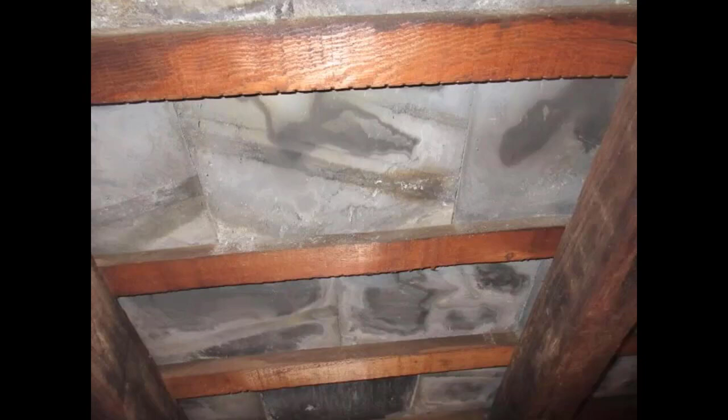A low pitch slate roof, you can walk on it. You stand on the middle of the slates, and they don't break. If the slates are breaking, the roof is failing, and you should see that before you get on it. But you're certainly not required by any standard to walk on the roof.

Here you can see this is a hard purple slate, probably came out of Vermont. Various sizes, very nice roof, really tremendously expensive roof. You just don't see anything like this installed in new construction. Well, I don't know. I don't inspect the $5 and $10 million houses, but I still don't think they're putting

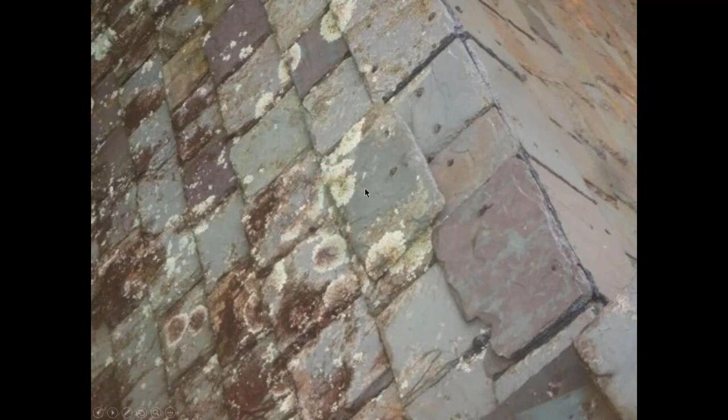these roofs on. Minor repairs, but these slates, even though they're probably close to 100 years old, there's nothing wrong with the slates. That's just moss. And one thing you would never tell somebody to do is power wash, well, any roof, but certainly not a slate roof. When you're in an attic with a slate roof, you will see daylight.

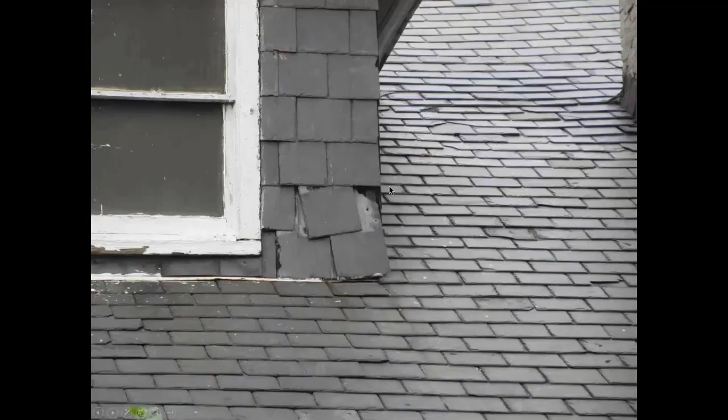The slates don't sit flat. So you're looking for big pieces of daylight or missing slates. Here you can see a slate's problem has been repaired. You can see tar repairs there. And again, these roofs will be nursed along with repairs for potentially decades.

Anytime I see a wooden roof, I just tell my clients, I'm very sorry for you. Wood shingles, wood shakes used to have tremendous durability. A wood shingle roof on a house was generally triple coverage, could last 50, 70 years, but the shingles and shakes these days have no decay and disease resistance.

When they were cutting down 100-year-old cedar trees and splitting the shingles out of the 100-year-old wood, those shingles would last quite a long time. Now the trees are grown 20, 30, 40 years. They're cut down, made into shingles, shakes, and 10 to 15 years is pretty much typical life expectancy for a new wood roof. And they're expensive.

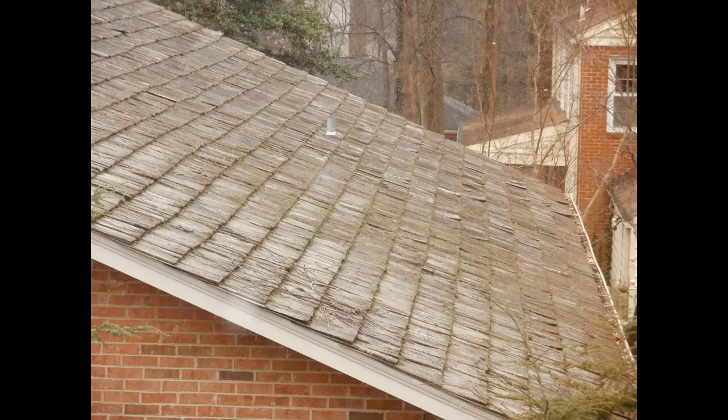This again is a shake roof. The shakes are lifting, and if you could get on that roof, you would see the interlayment in the shakes. I mean, that roof is pretty well gone. It may not be leaking. A lot of times on an old barn, you can look and see daylight, but when the rain hits the wooden shingles, they'll swell and seal.

Also, wooden roofs can be installed with no underlayment. A new wood roof, a lot of times they put them on solid sheathing with an underlayment beneath them. There's a lot of people that feel that when you install a shingle or shake roof on spaced sheathing with no underlayment, the air can circulate underneath the shake and they can dry out.

They last longer. When you put it on solid sheathing with felt paper under it, the underside has no air circulation. The water is trapped. And, again, a lot of people feel that compromises the longevity of the material.

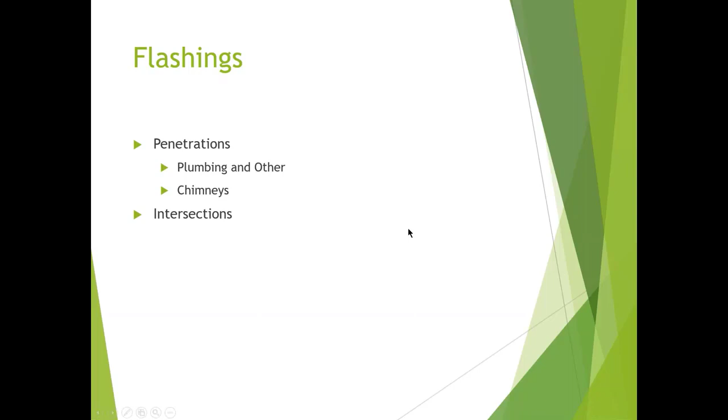With the roofing, the flashings are critical. With any system, it's the details. In roof installations, it's the flashings. Flashings at the penetrations, your plumbing and other vent pipe penetrations, furnaces, metal chimneys, metal and masonry. The intersections, the intersection between the roof and a wall.

You're also looking at the valleys. A lot of times the roof will leak at a valley. Also looking where a roof changes in pitch between a steeper roof and a low pitch roof. The code calls for flashing in these areas. You don't know if it's flashed, but you're looking underneath those areas for signs of leaks.

You're also looking again for problematic designs and installations. Sometimes the architect or whoever is designing an addition or designing a roof initially will just design for the appearance, and they'll say the roofer will be able to make this not leak. And in some situations, no matter what the roofer does, it's going to leak under the right situations or the wrong conditions.

The two-piece flashing system, the step flashing and the counter flashings, allow the wood structure to move in relation to the masonry. Wood expands and contracts with temperature and humidity. Masonry basically doesn't move. So the masonry doesn't move, the wood moves. If it's a one-piece flashing in this area, that flashing is subject to the movement of the wood roof and will ultimately start to fatigue and fail.

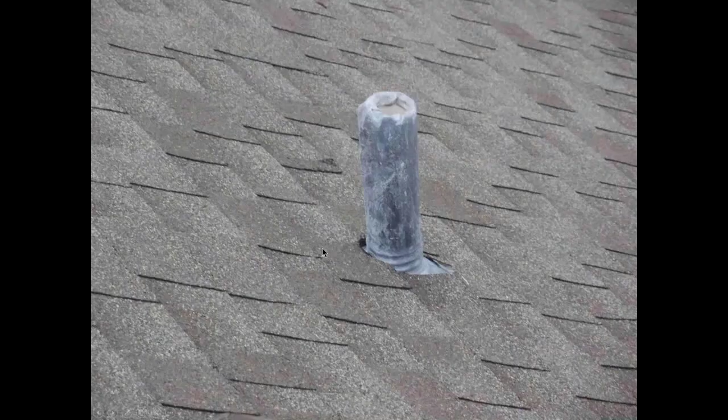Plumbing and other penetrations through the roof. This is something you don't see very much, but this is a lead boot installed. It actually goes over the entire pipe and is folded down inside the pipe. Lead flashing like this will outlast these shingles. It will last longer than 2 or potentially 3 roofs, as long as nobody puts a nail through it.

There are easy ways to fix this. I've seen where they just get a rubber boot and put it down over top of it. Sometimes they'll take a whole flashing, put it down over top of it, and there's basically a hard plastic, I think it's not roof helmet, I'm thinking gutter helmet. It basically looks like a helmet, but fits down over the vent pipe, covers this whole shooting match, and is good basically forever. But these are leaks, so you don't want to miss them.

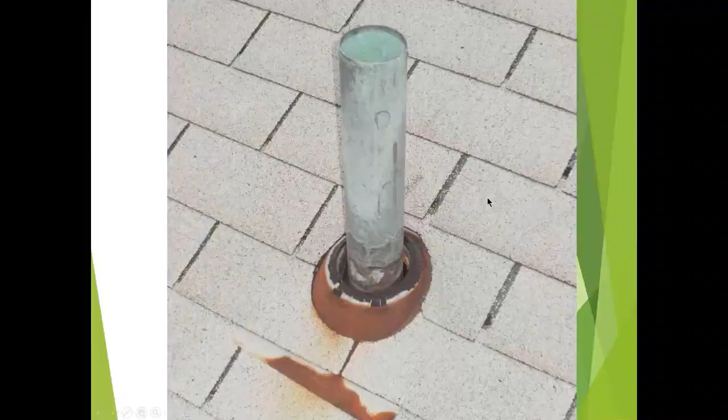Here the boot's just gone. Copper vent pipe. The shingles are fine, but it looks like when they replaced the roof, they just reused the old flashing.

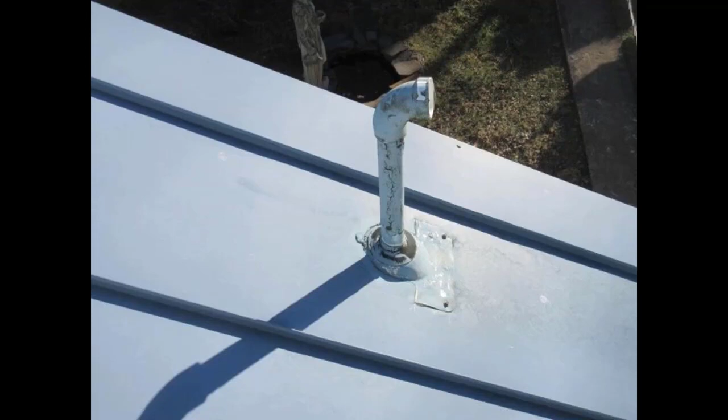This is ideally how the flashing should be installed in a metal roof. There's a slot. Here you can see it's not just a slot, but a U shape, and then tees out at the bottom. The plumbing vent flashing is slid up underneath that, and then the pipe is installed. You've got to put that flashing in the roof before you put the pipe up through it. You can't retrofit that. This is the retrofit. This is the ideal situation.

I've only seen that flashing installation a couple times. It's the same roofing company that did the gutter straps attached to the standing seams. Again, extraordinarily nice metal roof installation.

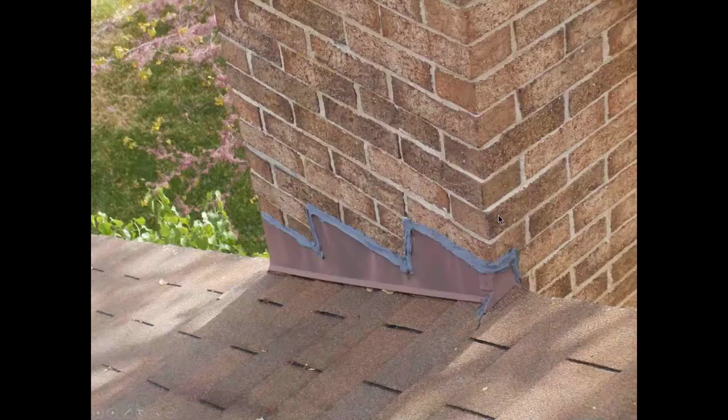Your chimneys. Through the roof, adjacent to the roof. We saw where the flashing was installed in the reglets, the open mortar joints, and then bent in and installed. That is the exception today. The rule is you'll have the step flashings installed.

This is your counter flashing, but it's just nailed to the masonry, and then the top of that is just sealed with caulk or roof cement. So every 2 to 3 years, somebody just needs to get up there, take a look at that. If it's cracked, reseal it, or if they're up there, just reseal it anyway. The metal expands and contracts and is constantly working to try and pull away from the brick, and sooner or later it will.

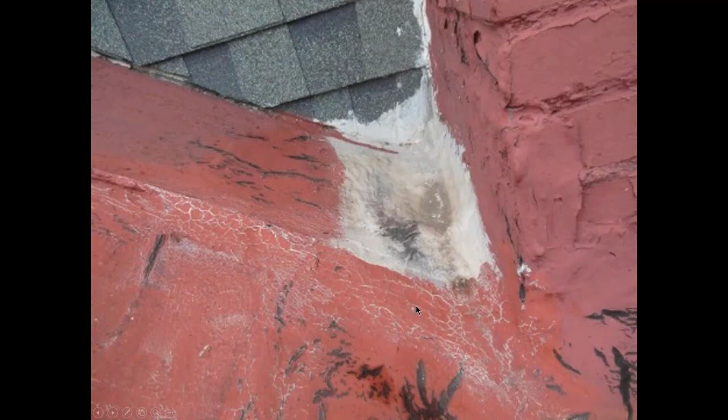To install a cricket, basically this entire thing gets taken apart, and with an old metal roof like this, a repair like that is difficult, and so people will just continue to tar it until they replace the metal roof. Again, you can see water's just ponding there. There are holes in there. You can see the sealant pulling away and cracking, and so it just leaks and leaks.

So all these are leaks. If it's not leaking this rain, it's still a leak. Nobody needs to evaluate it. It's a leak. It needs to be taken apart and rebuilt properly.

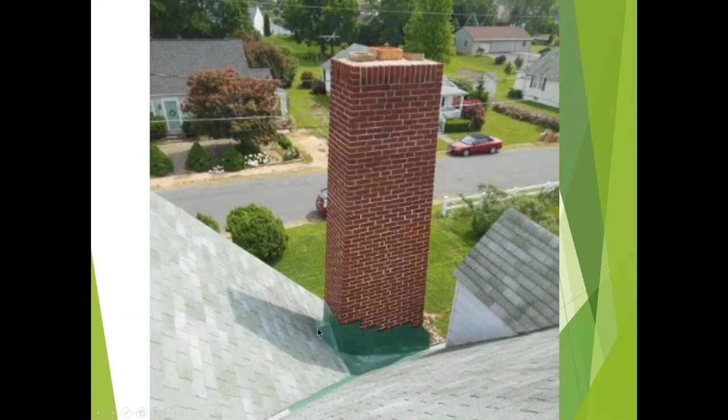How do you create a roofer's nightmare? You collect a ton of water in a valley, you build a giant chimney, and you put it at the bottom of the valley. The initial installation was a really nice piece of metal work in there, flat seam metal, solder joints, little cricket on this side. Could have done a cricket there, but they just did a large valley.

But again, over time, there's metal movement and fatigue where the metal just fails. And then people just get in there and start to caulk and tar and do all kinds of things. That's a leak. If not immediately, then soon that will just leak again. It's been repaired, and the repairs are just not permanent.

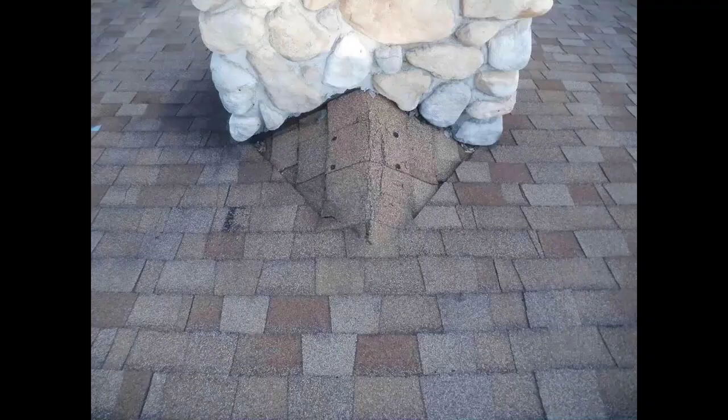Here, you've got a little tiny cricket built behind a concrete block chimney. Somebody just put the manufactured stone over top of it. Virtually impossible to repair this situation when things start to leak. You have to take the stone off to get to the flashings.

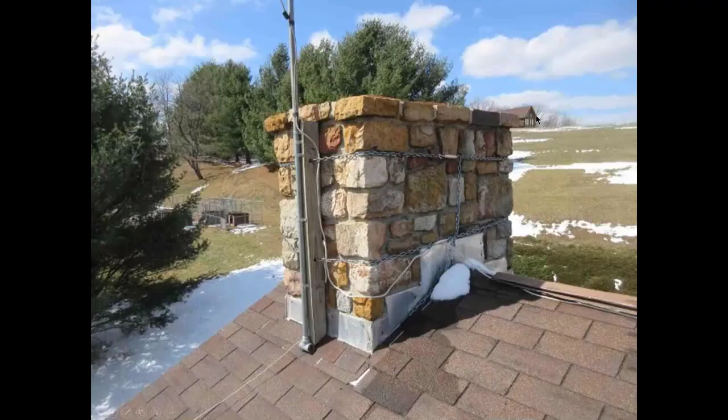Nice flashing. Somebody's actually chaining their antenna. They were sure that antenna was not going to blow off unless the 2x4 cracked. Even did a very nice job of putting a T on the iron pipe, the galvanized pipe holding the antenna mast, so it wouldn't poke a hole in the roof. And turnbuckles on the chains.

Of course, the cap on the chimney is probably cracked and leaking and letting water down in through the chimney. Here's your counter flashing set into reglets, so very nice, and somebody just had to have their antenna. Here you can see the top of the chimney is deteriorating.

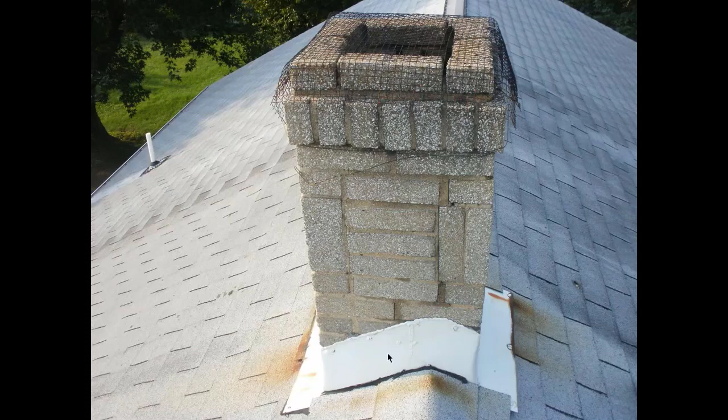Flashing is just sealed to the brick, and when you've got the joints in the brick, the mortar joints, your sealant is hard pressed to seal those tightly. So the only thing that can be done at this point is just keep resealing it, and ultimately it's kind of a small chimney to put step flashing and counter flashing in, but that's what should be done.

But even if it's perfect, go in the attic. You want to look at this, remember where this is when you go in the attic, and check the area above the fireplace. Most times you can see that chimney in the attic. You're looking for stained sheathing, rot, repairs, new sheathing. But these are leaks.

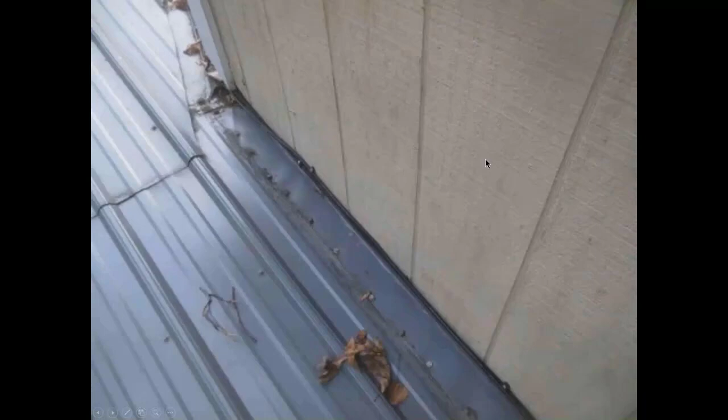Roof wall intersections, your flashings. No matter what you do with Texture 111 plywood, you're going to get leaks. The counter flashing should be under the Texture 111 plywood before that plywood is installed. Here you basically just have leaks. You fill the vulnerable area with holes by putting lots of fasteners in it, and then you just attempt to seal it. These are leaks.

Texture 111, the plywood sidings, any flashing should be under the plywood. Anytime there's a flashing installed on the plywood, it's just a leak.

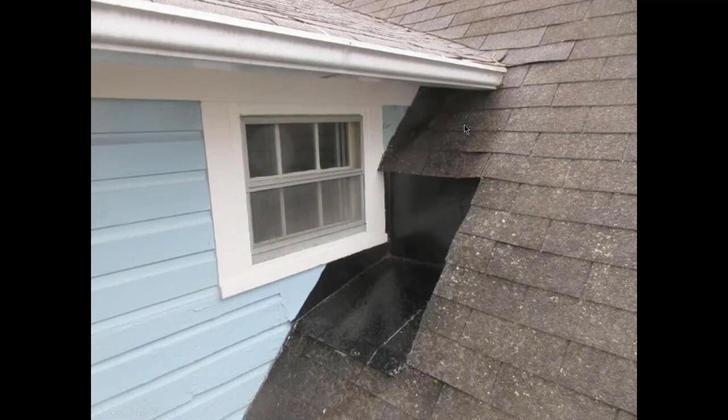Here, for whatever reason, the window was in the roof framing, whether it was an addition out the back or that's just what they built. Metal roof system installed in the cutout, nicely flashed, and the windowsill is not sitting down on the roof. So odds are pretty reasonable that it has worked successfully from the day it was installed.

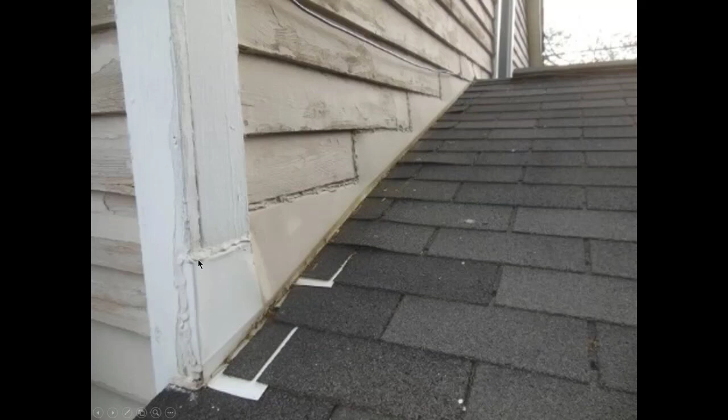Then they run down into the corner board and it didn't work so well there. So they did bend the top, put a caulk joint, and it has been leaking because they were caulking the corners of the boards. They were caulking all this. The water just came down and actually may have been getting in the intersection here at the back of the corner trim and just sneaking its way in.

So, they're thinking the water's coming in up top there. It most likely is just coming in right where the roof runs into the back of that corner trim. The flashing should have gone behind that corner trim and then the wood trim be installed. But the roofer's not a carpenter. He's not going to take the trim off, install his flashing, put the trim back. He's going to do whatever he can to avoid pulling that wood off and actually flashing it properly.

Again, this is just amateur work, step flashings, no counter flashings, a German siding with a profile to it, and just load it up with caulk or tar, and it's leaking almost immediately, and no amount of repairs will actually fix that. Ideally, the siding would be cut back, step flashing, and then a trim board installed with a flashing under the cut over the trim board.

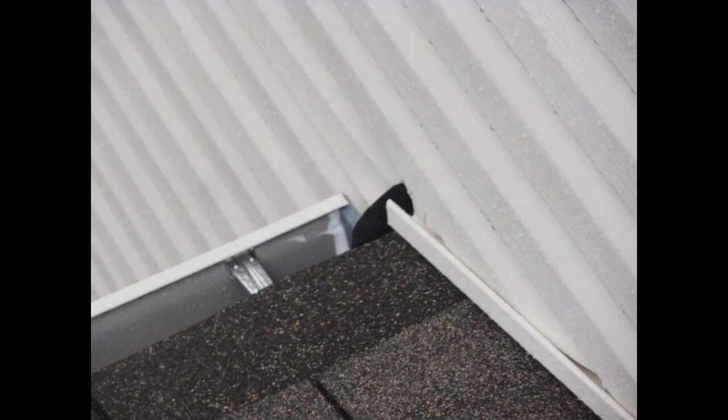Kick-out flashings, they are now in the code. They have been in the code for 10, 15, 20 years, and they are now starting to really actually look to see that they are there. In new construction, this is a little teeny kick-out flashing. If you don't know what a kick-out flashing is, basically, water running down the roof should be directed away from the sidewall and kicked out into the adjacent gutter. That's what a kick-out flashing does.

They should be a minimum of, I believe, 5 inches tall and 3 or 4 inches wide. So you should see basically a big piece of metal, and you can see these from the ground. If they're not there, you should definitely be recommending that they be installed, or at a minimum, where the J channel ends, just caulk that intersection to have the water head out and not behind the siding.

Here Dave? Again, there's a kick out. Yes, sir. Also, the gutter ends, both in the previous picture and this picture, that gutter end just below your cursor is supposed to be a minimum of 1 inch away from the siding. There's actually supposed to be an air gap between the end of the gutter and whatever sheathing you've got. Well, the siding, and I think that applies specifically to HardiePlank. I don't know that that's a requirement for vinyl siding, but it certainly is not a bad idea.

With HardiePlank, that's a manufacturer's spec. I don't know that that exists with vinyl siding, and certainly, you know, it should be there with wood siding, but again, I don't know that there's any recommendation specifically for that. But with HardiePlank, absolutely, that's in the manufacturer's installation instructions. Thank you, Bob.

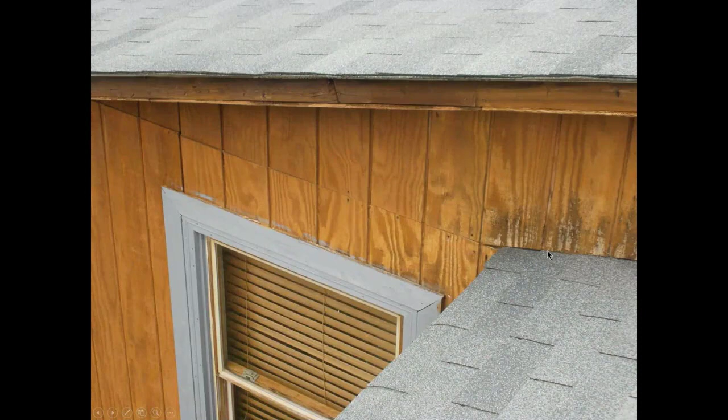Here, no flashing, wood roof down. Hopefully there is a flashing underneath the siding. There should be a space between the wood roof and actually wood or hardy plank. The installation instructions are actually pretty similar. The concern with hardy plank and with wood is you're trying to limit the absorption of water into the siding. So ideally the wood or hardy plank should be an inch or two above the roof. You should see the flashing, and there should be kick-out flashings.

Here you can just see literally the water runs down the roof and drains in the joint. I mean, this is basically a terrible installation of plywood siding. There's no flashing over the window. There should be a Z flashing at the horizontal joint. And you can also see the water is being wicked up into the siding there and ultimately deteriorating the plywood siding.

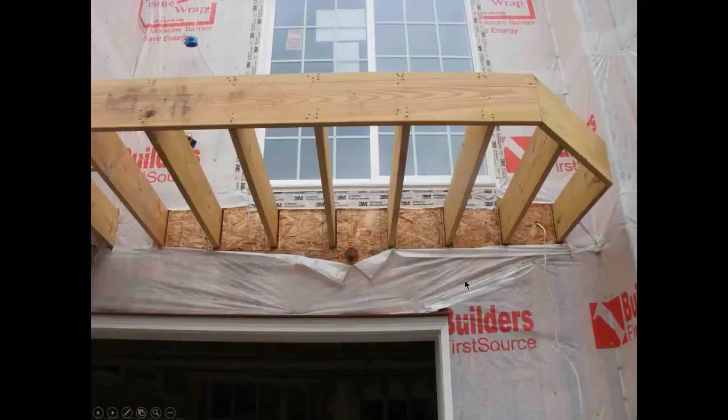These balconies where they poke the balcony out the side wall, there should be a horseshoe flashing installed over every joist that extends a few inches out that you should be able to see. These are never flashed properly. I can pretty much guarantee you they're never flashed properly. Doesn't make any difference. You just have water getting down. They're following these joists back in. These things are just going to be replaced wholesale in 5, 10, 15 years. With any amount of luck, not too many of them collapse before they start replacing them.

And these joists go back. If they stick out 3 feet, they should go back in at least 3 times. So if they're sticking out 3 feet, they should run 9 feet back in. When these start to rot and fail, water gets inside the framing around the joists. If the joists themselves aren't rotting, the framing supporting them is rotting. There are going to be major failures and replacements. Big bucks involved in this.

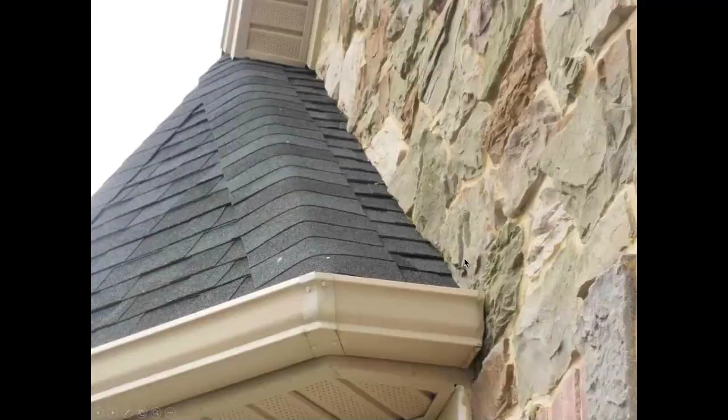Here, with the manufactured stone, the stone is supposed to be at least 2 inches up. You're supposed to have a flashing in there. When it's time to replace this roof at some point in the future, they're going to have to, who the heck knows, leave the existing step flashing. There should be a kick out here. The manufactured stone is the same as stucco, is the same as Hardie plank. The gutter should be an inch away. There should be a kick out flashing.

What do you tell your client buying a situation like this? It's not right. It potentially can be very problematic. You can have significant damage to your structure behind the stone. You can't see it. You can't see it in the house a lot of times. It's on the outside portions of the framing. Caulking might be some sort of a temporary help, but it has the potential for being a real mess. And you want to emphasize that in your report, not just saying it to your client, but it should be noted in your report as a problem item, even though no visible defects are showing.

Hey, Dave. Yes, sir. That last slide, they should have a 2-inch clearance over those shingles. Yeah, you should have 2-inch space between the shingles and the manufactured stone. That's correct. And definitely a kick out. You should see your flashing in there. Yeah. You should see your step flashing. You should see your kick out. And I mean, if you don't see it, again, your client's potentially buying the house.

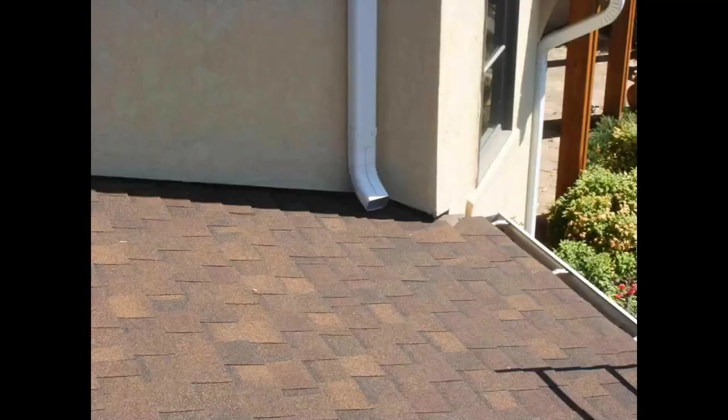Okay. And actually, when you're looking at details like this, you know it's a 5 or 10-year-old installation. Because really, when they're putting it up now, pretty much most of the builders do have a clue about this stuff now. They've all been tagged on it. Thank you. Here, your stucco is maybe a 1/2 inch up, so that's certainly better. This was probably at this point maybe a 15-year-old house.

And looking at this roof from the ground, that could be a situation that you could easily miss. So my recommendation is at a minimum, take your ladder. If you don't walk the roof, put your ladder up on the gutter and look at everything. Lift the shingles at the eaves. That'll let you see details like this to call out issues.

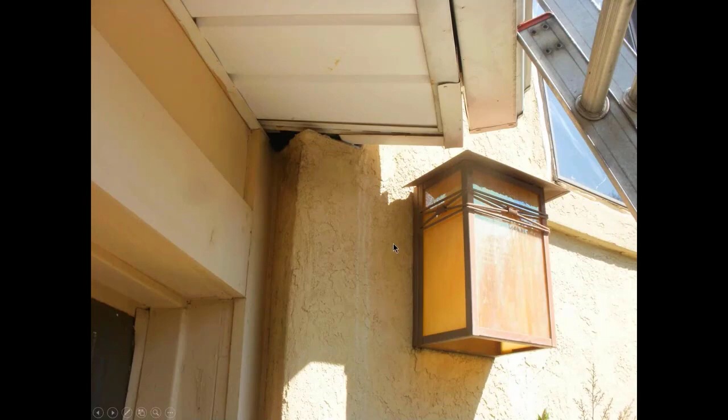Hey, Dave. Yes, sir. Sorry to keep interrupting. One thing on the last slide. I asked for it. Can you talk about the requirements for dimensional shingles on low slope roof real quick? There was a question about it before. On low slope roofs, do the same rules apply for architectural shingles? I think they're talking about the pitch. To the best of my knowledge, yes. But I do not have a specific answer for that.

It's an excellent question. I have not researched it, I do not know, but to the best of my knowledge, if you put that ice guard underneath, it's basically the same sort of installation. You're sealing around the nails. I don't see why it wouldn't work, but I do not have an absolute yes, you can, or no, you can't. If anybody does know, again, toss it in the chat box or chime in.

Hey, Dave. Yes. I thought it required 2 layers of self-healing ice and snow guard. That's what I saw the last time I looked it up. 2 layers of 15-pound felt over the ice and snow guard? No, 2 layers of self-healing ice and snow guard. Or the ice and snow guard? No, no. Once your pitch gets too low for just a regular installation, the last time I looked, it said 2 layers of self-healing ice and snow guard.

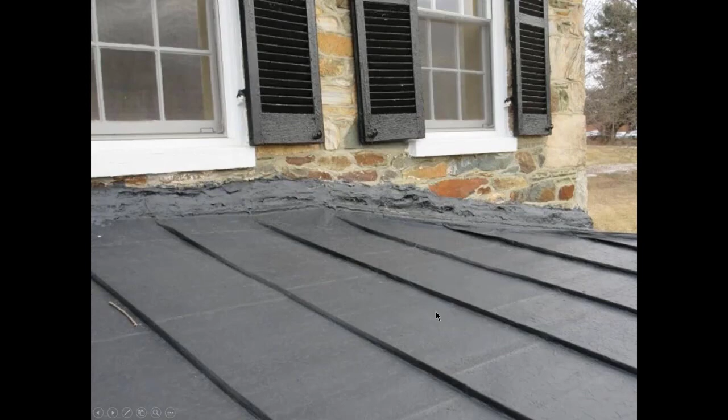Here, a metal roof to a stone wall, and somebody just simply gave up and brought out the 5-gallon bucket of tar. Beautiful stone wall, nice metal roof. And there's a possibility the porch settled and that roof pulled away, and they didn't know what to do but tar.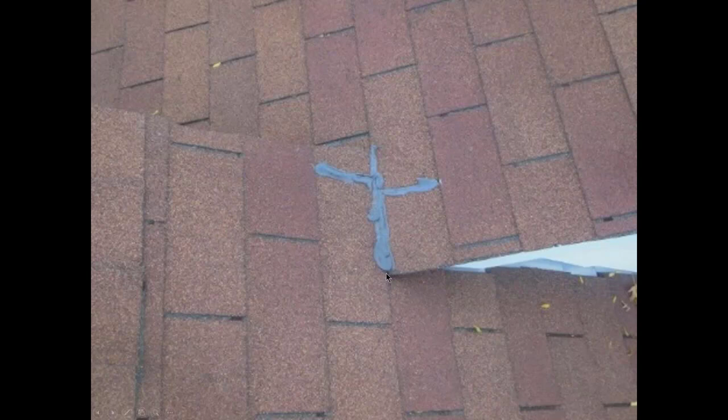Valleys. It's your condos where you have the horizontal valley. It's about a shingle wide, about 12 inches wide. There should ideally be a piece of metal in there. Many times there's not. They just seal it and hope for the best.

This is what you like to see. A piece of metal running underneath the whole thing with no nails in the metal that you can see. That should divert the water, and it's extended out past the shingles on both sides. That is not leaking. This is probably leaking. This most certainly is leaking.

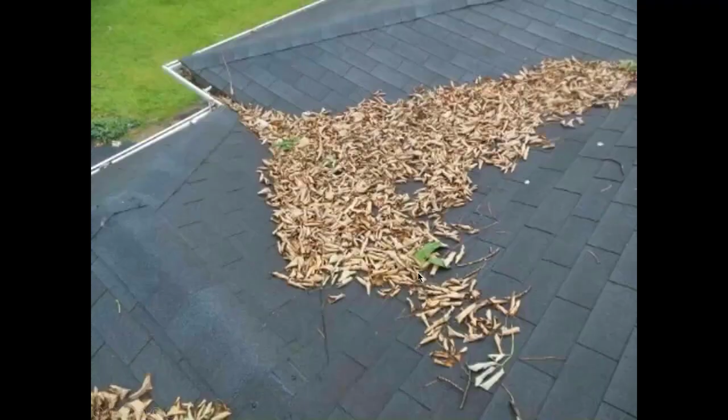Bad. Better than bad. Good. And best does not create the situation in the first place, but that's beyond your control. Here, you're collecting a bunch of water, aiming it at a valley. You don't see any indication of a low slope roofing material, and who the heck knows what's going on under all those leaves. But again, pretty much assured there's leaks in there somewhere.

Here, same situation, not covered with leaves, but you're collecting a bunch of water, aiming it, and then you've got a roof intersection here, a flashing intersection. That water's going to get down in there. No kick out flashing, no sealing at the top of the counter flashing or step flashing that is there. Leaks.

Aluminum expands and contracts. The aluminum valley flashing is supposed to be folded over with clips holding it so it can expand and contract. When the aluminum valley flashing is just nailed under the shingles, it's pinned, it still expands and contracts and will buckle. Aluminum, a very soft metal with very limited amount of flexing.

You actually cut aluminum flashing with a knife and then you fold it several times and it breaks at the slice. You do the same thing in a valley, you have leaks. And no easy fix for that. It's just take it apart and redo it. You tar it until you're tired of tarring it.

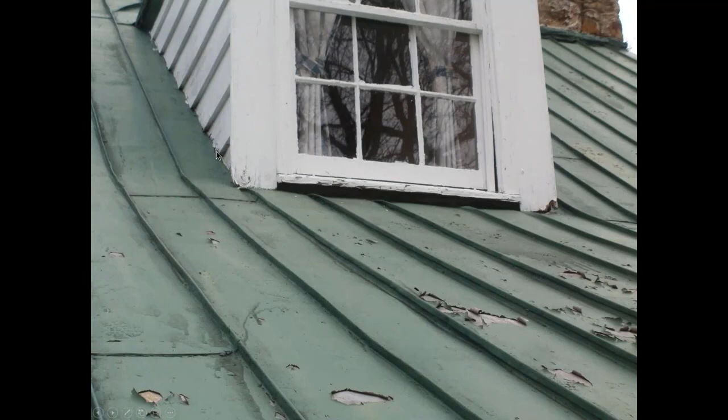But in northern climates, you get up into Pennsylvania, New York, New England, Canada, these things just leak like sieves. So there they understand how to do the underlayment to prevent these. But there should be a flashing wherever a roof changes pitch. Here, your metal roof is basically self-flashed, but when you run the change in pitch under the dormer, ideally you would have flashing running 6 or 8 inches up under all that wooden trim and that siding.

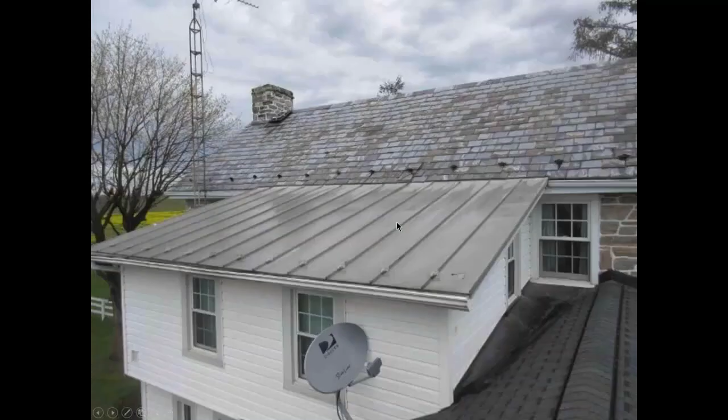You don't know, but you're inside. If you can get in the attic, look at these areas in the dormers when you're in the attic adjacent to it. If you can see those, look for stains. Here, you not only have a change in pitch, you have a change in material. This was the roof yesterday. The slates are deteriorated, so it's leaking.

When you see a situation like this, ideally, you want to see that the metal roof, the low pitch roof, actually runs up 18 inches or 2 feet onto the steep roof, and you should have the low pitch roof visible. You should not have the shingle or, in this particular case, slate roof running right down to the low pitch roof, because again, what you have with the ice dam issue is your shingle roof is filled with nails. So the metal roof that runs up and under, you've got holes there.

Snow melt runs down, hits the low pitch roof, you get your ice dam, and you basically get your ice dam sitting on the asphalt shingles or slate that's full of holes. So the ice dam material should run up, or you should see the low pitch material run up onto the steeper roof, and then ideally the shingles should be 1 foot or 18 inches up off of that change in pitch. This is basically a leak, and actually I have photos of, this is an active leak.

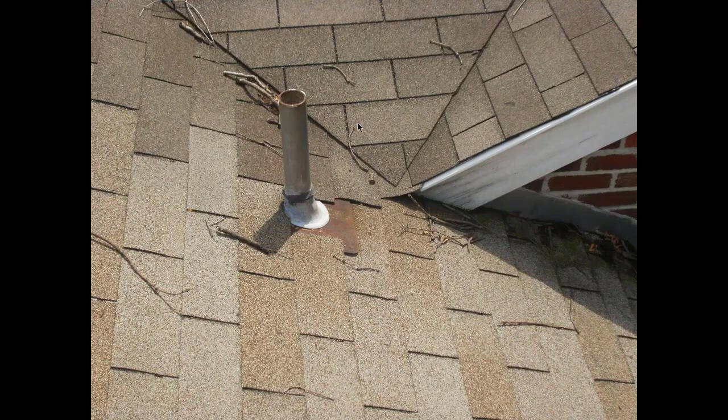Put a plumbing vent near the delicate situation. Again, a lot of times these are additions where other roofs are brought into play. 3 roofs draining into a valley. You've got a flashing that terminates there, and put a hole in the roof and load the thing up with ice and snow.

You do have step flashing and counter flashing. The step flashing has not been properly installed. The counter flashing was just slapped to the side of the brick and sealed multiple times. No cricket there. Collecting the water, draining it at the brick chimney, so the water's running down the side of the chimney in the attic. It's also probably running down onto the ceilings. It's just a mess. That's a problematic design. Funky installation.

This again was the house I saw yesterday, with an addition coming into an addition, a couple of windows, the window sills are sitting down. This is actually EPDM, I can never get it straight, the flat roofing material. They've actually kept the siding up a couple inches, but you got a windowsill. Again, it seems to be working fine. There were no stains on the window, no stains under each window, no stains on the ceiling.

Well, actually, I did have stains on the ceiling. Here, the stains on the ceiling were here. There were no visible stains anywhere here, but you load it up with ice and snow, water's going to find its way. All these are just sealant joints. Nothing else you can do. Pile up the snow and it's going to leak.

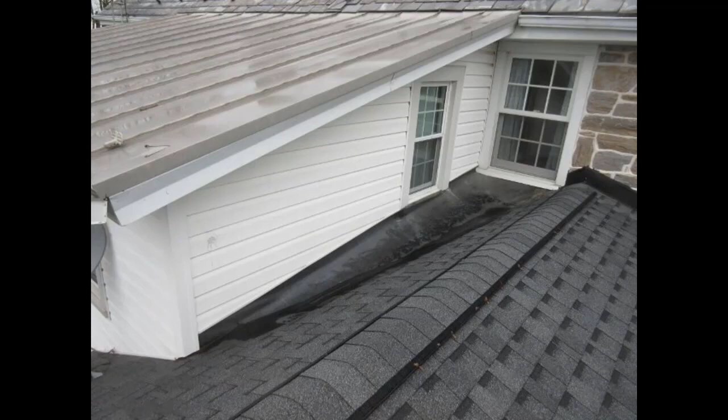Again, a situation that the roofer's going to fix. The roofer here did a very credible job, but under the wrong situation, it's 100%, it's got to leak at some point. What can you do with it? What can a roofer do with a situation like that?

You don't need to get on a roof to see these situations. This was a relatively low slope, 1-story addition, got up there, a lot of photos, but I knew that was leaking when I was in the bedroom looking out the window. Again, you take a photo like this. It's not the ideal photo, but if you're not climbing the roof, you're not getting out and looking at it.

You open the window, take a photo through the window. If you can raise the screen and get out, you can take more photos, but this is all you need. Again, you don't need to document perfectly. You just need to document this is a problematic situation. You don't have to get on the roof.

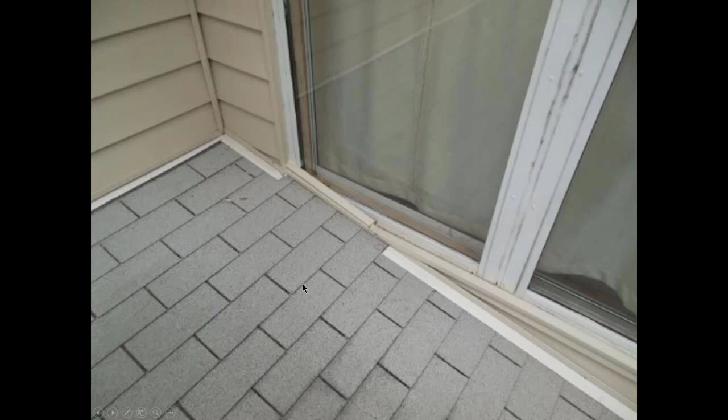Here, the windowsill actually runs below the level of the roof. You just can't possibly not leak. You know, how many negatives do you want to put in a sentence? But it is leaking. Maybe not every rain, but you get a good hard rain, it's leaking. Again, the windowsill is below the level of the roof. You can't keep water out of there. You can't seal that to make it not leak.

Down here, you can just see it's not a step flashing. It's a one-piece flashing, but it just terminates. That's a hole that's just letting water in wholesale.

Having a door step out onto a low-pitch roof, besides the fact that somebody can open the door, walk out on a roof and fall 10, 15 feet, guardrail issues are obvious there. But again, this is something that it's almost impossible to flash and not have a leak at some point.

Initially, if the roof is run completely under the door threshold and up the wall and around, that would work for the first roof, but once it's time to re-roof it, they would need to take that entire door apart, take it out, run the roofing completely in, make a pan, and then put everything back. The roofer's just not going to do that.

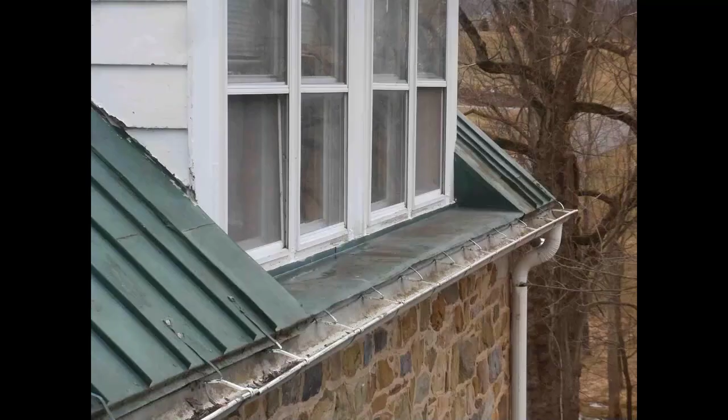Here you've got a flat roof, the wood framing, a metal roof probably had some pitch at some point, but the stone wall did not shrink. Wood framing under deflection and load, who knows how they actually framed underneath it, but now you have a negative pitch. Your metal roof just turns up to the windowsill, is sealed, the water's just sitting there, so again, that's a leak. And then you put ice and snow on it, and that's just a bigger leak.

Here they're running the flashings up the wood to the underside of the siding. Not a bad situation, or the best of a bad situation, but then you put a windowsill in it. You look at it, you just photograph it, it's leaking. Well, we don't see any sign. I'm sorry, it's leaking. It collects water. You can see the leak right there, no matter what they did to flash it.

And this is usually an addition. The window was there first. The addition came with the roof running. Well, let's get as steep a roof pitch as possible. But again, it's a leak.

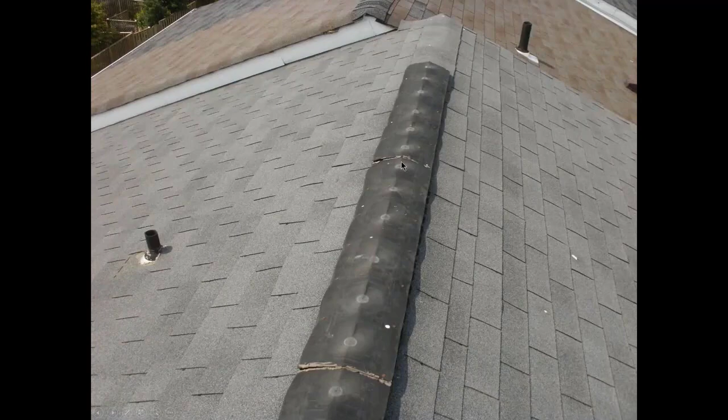Whoops, forgot to install the caps on the ridge vent. These are the joints in the ridge vent. Roofs typically don't leak at the ridge, but when you leave a hole at the ridge, yes, they do leak. The sheathing's deteriorated. Trusses look all right.

And again, ideally, they're not running the 8-inch strip of sheathing. They want to have a 2-foot piece of sheathing at the ridge. That's what you see today. The older ones, they would just run anywhere from 8 inches. Sometimes you'd have 2 or 3 inch pieces there. So when they nailed the ridge vent, it was nailed into basically nothing.

These are your old townhomes a lot of times. Low pitch roofs or flat roofs. No roof should ever be flat. Every roof should have at least some pitch to drain.

Oh, thank you, Devin. The actual chemical name for the EPDM roof.

Materials, EDPM. I did get it right. I spell checked before I put the presentation together. I don't know how many times I've given this at this point.

So it's typically called a rubber roof, but it's not rubber. It is ethylene, propylene, diene, monomer, rubber.

Actually, Dave, both you and Devin have it wrong. Okay. EPDM? Right. So why do you have a question mark? It should be EDPM exclamation point. Dave, that's what he meant to write. I think Devin knows. I can't even be right when I'm right. Hey, I put in 4 errors in every presentation, and I'm just checking to see who is paying attention. And I don't know which 4 errors I've put in the presentation.

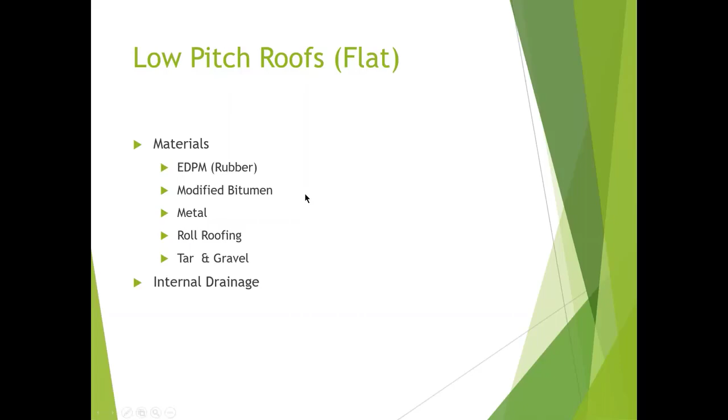If you get a really large roof, you will have seams through the field. They're glued, and then there's a flashing. Again, the uncured material is glued on top as a flashing, and this makes the seal between the EPDM roofing and the metal flashing. You don't join the field material directly to the flashing. There's the uncured material that's sealed over top of it.

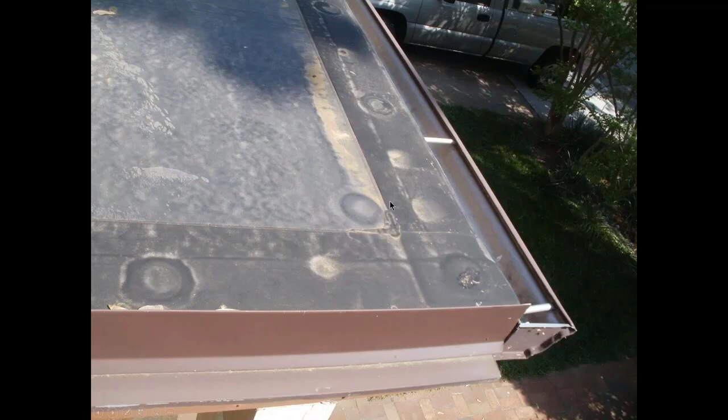I got one more sentence, then I'll let you in, Sean. Go ahead. Yeah, go ahead. Crap. Come and gone. I'm sorry. No. It's not your fault.

This material is not compatible with asphalt. Tar, asphalt, any petroleum-based product is incompatible with repairing this. Tar will rot this. So if somebody has a problem with this stuff and they're slapping tar on it, they're basically rotting the material out. That's just terribly problematic. Sean, yes.

I was just going to say, Jeff was asking what are the ways to tell the difference between rolled roofing and modified bitumen. Excellent. I do actually have a couple shots of rolled roofing, but basically with modified bitumen, somebody has figured out how to get hot tar in a roll with a fiberglass membrane in the middle of that roll. Roll roofing has no fiberglass membrane. You can take the edge of the roll roofing and you can tear it. If you can't tear it, it's modified bitumen. If you can tear it, it's roll roofing. That's an excellent question. Thank you very much, Jeff.

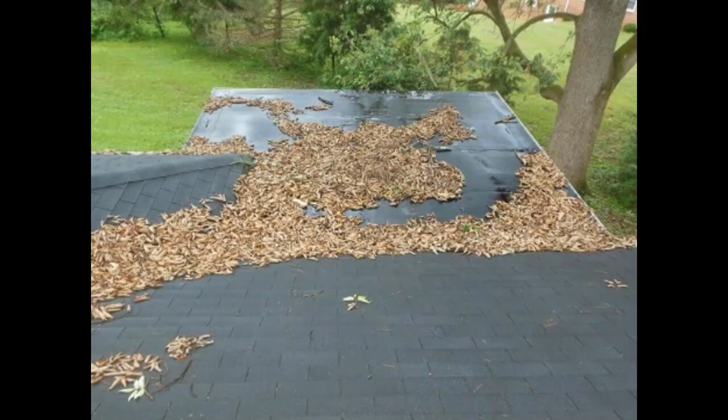The roll roofing 36 inches, that's incorrect. Roll roofing is also 39-inch rolls, but they lap at 3 inches. The modified bitumen is 39-inch rolls and they lap at 3 inches. So both the roll roofing and the modified bitumen are 39 inches. They lap 3 inches, but you can tear the roll roofing. You can't tear the modified bitumen. Just go to an edge and just try and make a little tear in it. You're not creating a leak. You're determining what the material is.

This again is your rubber roof. There should be no ponding on that. There's some ponding usually. And if it's not raining, you can still see the outlines of the ponds; there's little bits of dirt when you have ponding on a roof. Those roofs should have no ponding. The maximum permissible ponding on a low pitch roof is 0.

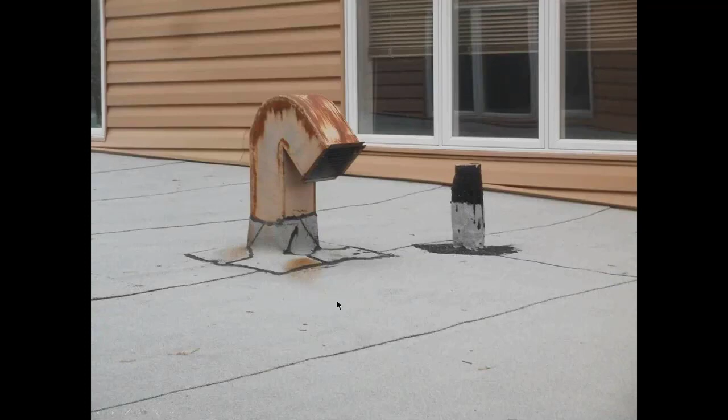Here's your modified bitumen, and I do have some slides for the roll roofing, so I'll be able to show you a couple of the questions about the roll roofing. This is the modified bitumen. It looks for all the world like the roll roofing. And this is actually how you do the flashing. You've got your penetrations. This is the torch applied. They actually cut these individual pieces of material. They heat them up and they just slap them down on top.

And the ideal situation with the modified bitumen is you have material that does not have any granules. And then you're basically sealing melted material to melted material. You heat both the upper and lower layer with the torch, whether there's granules or not. But when there's no granules, you've got basically liquid bitumen on both surfaces that are meeting. Here you heat both the upper and lower, but you're dropping your flashing pieces down on the granules. So you've heated the granules. There's a little bit of melted material in between the granules, and then you drop a melted piece of the flashing material on top. And there's the 2 lower pieces.

They heat it and slap it, and then sometimes they'll seal these, but each individual piece, you're holding it, heating it with a torch, and then slapping it down while it's still molten, and you heat it enough so it melts, but you don't heat it so much that all the bitumen just starts dripping off on the roof. Pipe penetrations through the roof, you just heat and wrap that material while it's still hot and molten, wrap it around it, and then the top is sealed basically just with tar in a can. So there's just regular maintenance on a joint like this. Again, the only way to really finish seal that is with roof cement in the tube, and it's just an area that needs regular maintenance.

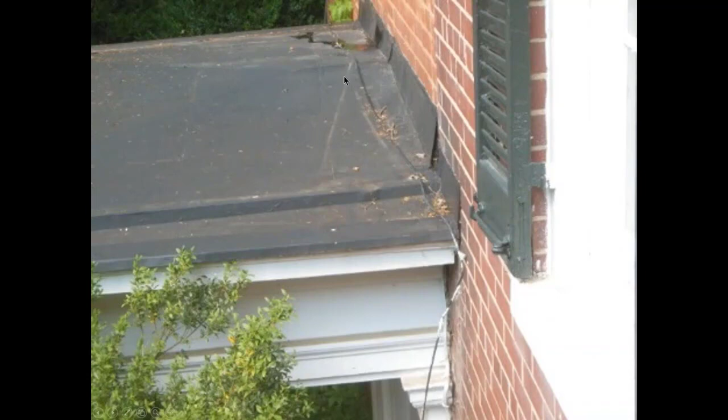This is your built-in valley. There's draining. Look at these areas very carefully. Don't walk in them. Don't step in these if you're on this roof inspecting it. Do not step in these gutters. Step over them. Step around them. Don't get on it.

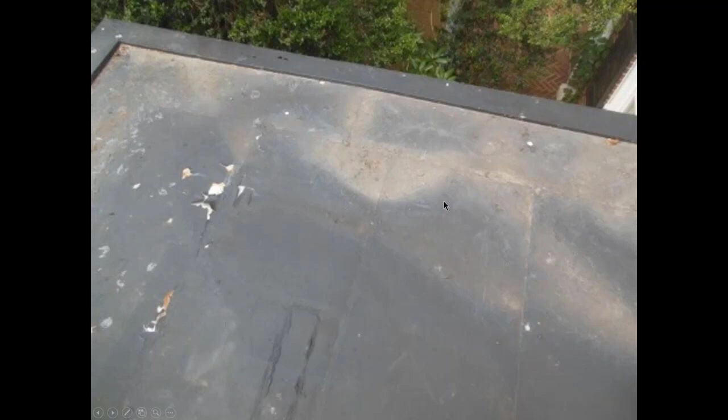Sometimes the metal is stretched, or if it's a modern low slope roofing system, the material is stretched. The material should not be stretched. But if you step in it, you can be the cause of the failure. Something that was working, but now it's got a tear in it, and that's a pretty good leak. So do not step in these valleys. Actually, good rule of thumb, don't step in any valley. Don't step on any bubbles either. Yep. Avoid tender looking situations, because you can be the cause of the leak.

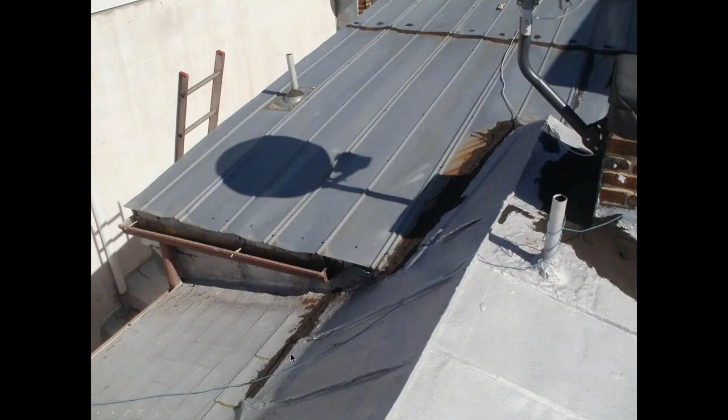You've got a flat roof draining, multiple intersections, and you put your heat pump or your air conditioner on it. You just tar the living daylights out of it and hope it doesn't leak until the check clears. Again, you can call it whatever you like in your report. I mean, it's just a mess. You've got leaks everywhere on that one, and just haphazard attempts at repair.

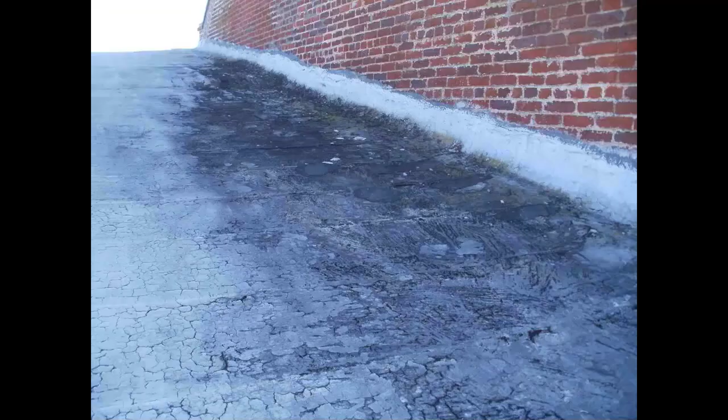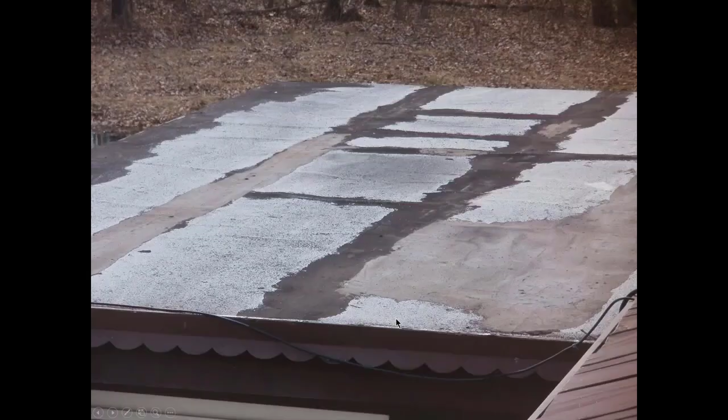Here's your roll roofing. There's single coverage and double coverage roll roofing. Single coverage should not be installed on a house. There's your single coverage. This is double coverage. Again, these rolls are all 36 inches. The double coverage, they actually lap it every 18 inches, so that you have 2 layers of material, and this is also referred to as a selvage roof. S-E-L-V, I think E-D-G-E or A-D-G-E, a selvage roof. But basically roll roofing, it's an inexpensive roof.

But when you see the 18-inch laps, that's not 18-inch material, that's 36-inch material, but it's lapped twice. So you can actually have cracks and holes in the top layer, and you've got an entire full thickness layer underneath it that is still shedding water. So a double coverage roof, you have 2 layers of material, you need holes in both layers of material, and you can get holes in both layers of material.

When they start the roof, there should be a 20-inch or 21-inch layer of material, and then your first layer of the 36-inch material is laid, and then it laps every 18 inches. So there should be 2 layers of material with the double coverage roofing. Here you can kind of see the top layer is gone. There's a bottom layer there, and the drip edge is shot. So this roof is not limited life expectancy. This roof needs to be replaced. And you put enough photos in your report that look like that, your client's going to get it.

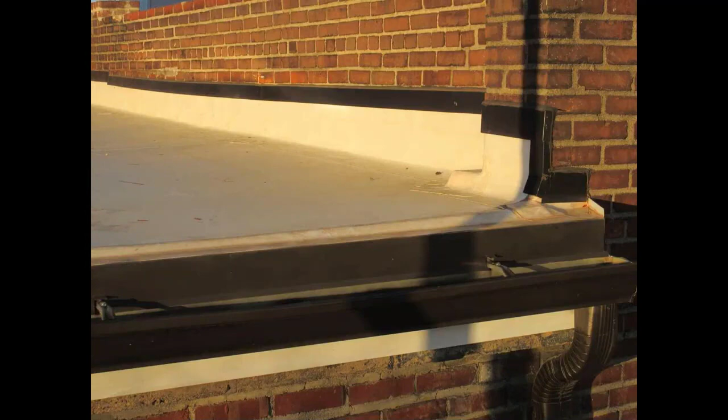Dave, this is Bob Sisson. I have seen it. I've seen it a lot on the roof decks. Well, you're not seeing this. What you're seeing is Duradek, which we're going to get to. This is thermoplastic polyolefin. You should not see this on decks. It's not a walkable roof.

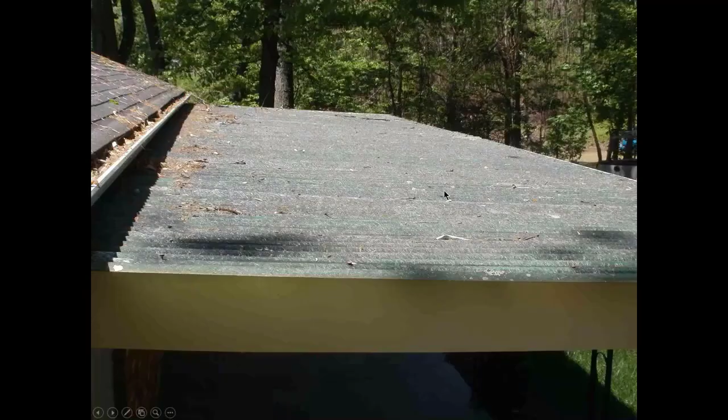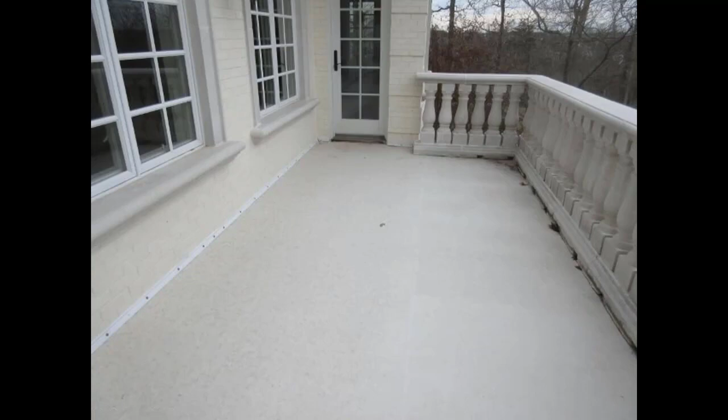Fiberglass sheet. This is a porch. Don't walk on this stuff. You will go right through it. Duradek. This is the material that you're seeing on the balconies, on the decks. This is a walkable roofing material. It has an odd termination bar. This is how the stuff is terminated. This is approved for use.

You want to tell your clients, it is possible to put furniture on it, but you want to make sure they've got cushions on the legs, coasters on the legs, something that's not going to put little holes and tears in it. Also, this particular one, it's running to a couple of door thresholds. There were doors on each end of the balcony.

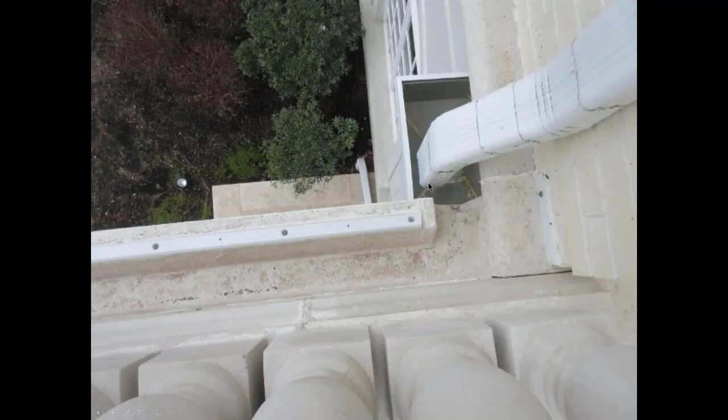They ran a gutter and downspout there. They put a built-in gutter on this guy. This is cast concrete railing, guardrail, just sitting on the roof, but it weighed so much you couldn't budge it. This is the termination bar. They had a built-in gutter running it to a downspout, not many trees around it.

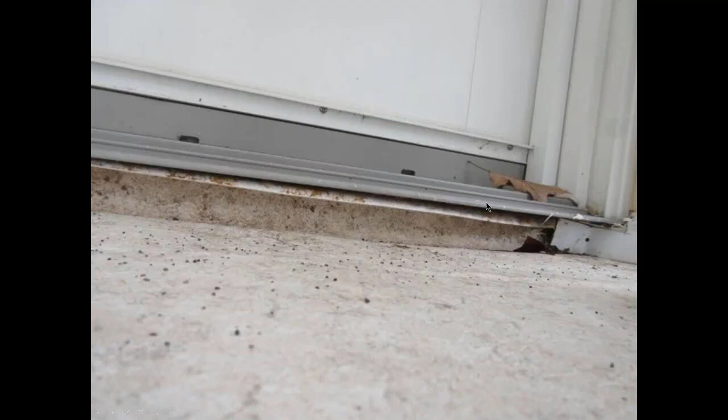This is the detail that's on a leak. Yep. The material just wasn't sealed to the door threshold. It was turned up, and you're looking at the loose material there. So sooner or later, that baby's going to leak.

Balconies. Whenever you have a balcony, whether you can see it or not, there should be a roofing material there. You also want to look at your guardrails on the balconies. You want to look at a wear surface. Sometimes there's a wear surface over a roof. Sometimes there's a combination. The Duradek, that is a walkable roof. It's designed to be a deck and a roof. But this is the only material that really works for that.

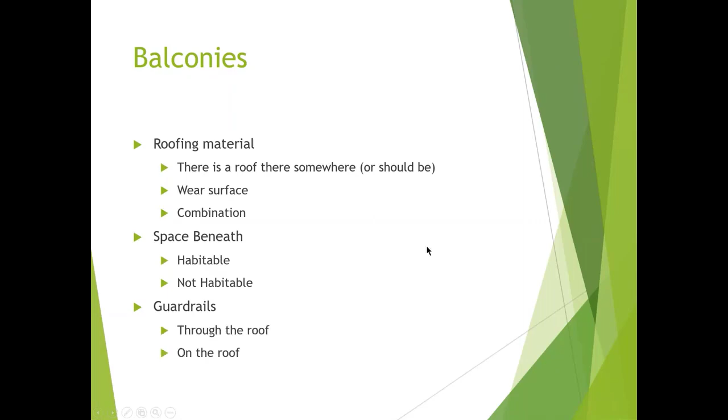There's a space beneath, habitable or not habitable, with your balconies. The guardrails either go through the roof or on the roof. With your guardrail, there's a roofing material, there's a 4x4 post. The roofing material is installed all the way up the post. The balcony rail sits over top of the post. That's what an old carpenter taught me, and that works.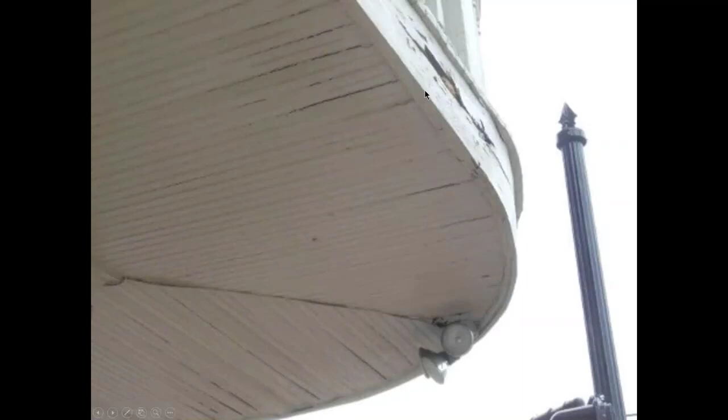But there's your wood floor, there's your ceiling. Somewhere in there's got to be a roof shedding water. But looking at the underside, you can see, it's 100 years old. There's some failures, but something's keeping that dry. When you get modifications and changes, maybe not so much.

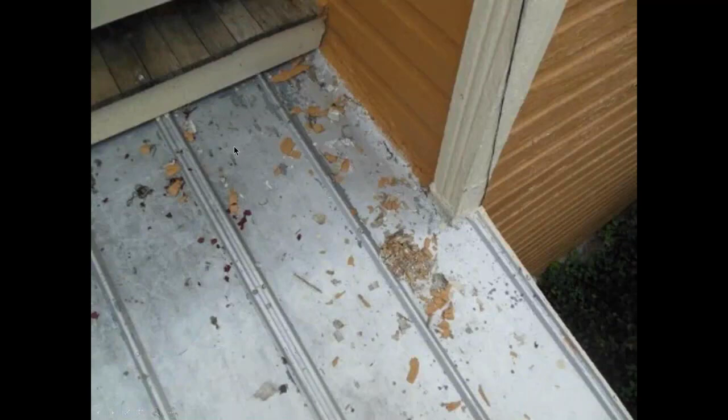Same situation, there's your wood floor. You hope there's a roof. You've got an exposed fastener cheap metal roof shoved under it. Look underneath this in the habitable room underneath, look for signs of failure, and there's problems. And this guardrail, again, you sneeze and that would move. It's not holding what it's got to hold.

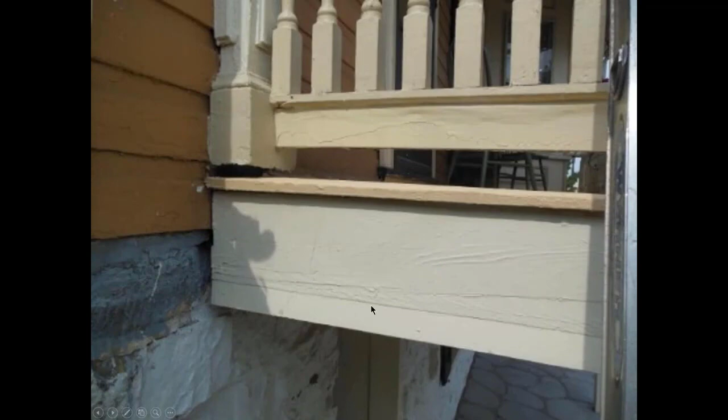There's a wood floor, there's a wood ceiling. Somewhere there's got to be something that's keeping that guy dry. This is the plywood underneath. There were no signs of stains on it, and the plywood wasn't brand new.

Your little Juliet balconies. These are roofs. There's stone. There's all kinds of flashing details. So when you see these outside, you're inside looking, and even if you don't see signs, you just indicate the problem. The guardrail screwed through the roof. There's 4 holes at every one of these guardrail attachment points.

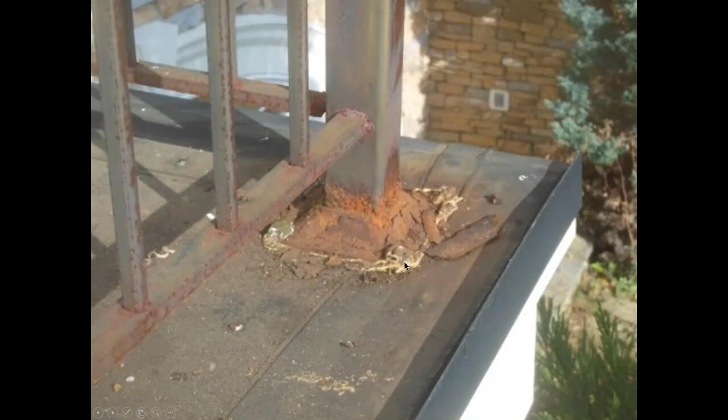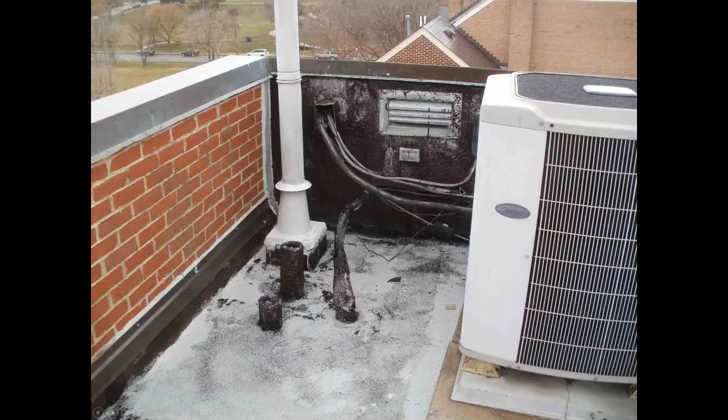Another balcony. Leaks, leaks, leaks. And this was like a 2 or 3 year old house in Ashburn, Lansdowne. Leaks. So just scream, whether you can see it or not. But this, again, 3 year old house, there were signs there's water in this stuff. All had to be taken apart, re-roofed. It's all just leaking. And if it's manufactured framing, there's serious compromise to the structure very quickly.

Just an ugly situation, tons of penetrations, chimneys, flat roofing system. Just look at all these details. Here's your lead collars being bent up and around and sealed. Again, just a total disaster from day one. It's been leaking and just patched.

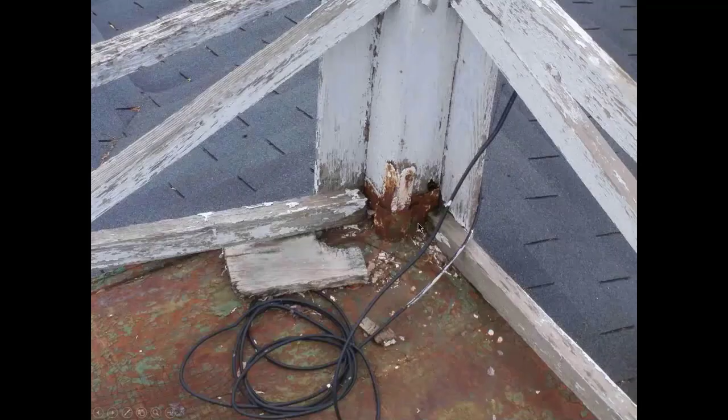These things, if somebody can get out onto that, that's an absolute hazard. You want to get up. A lot of these are 2-story windows. You can't see. Get your ladder. Put it gingerly on the rail. Don't assume the rail's going to hold you. Just leaks, leaks, leaks. 100-year-old leaks.

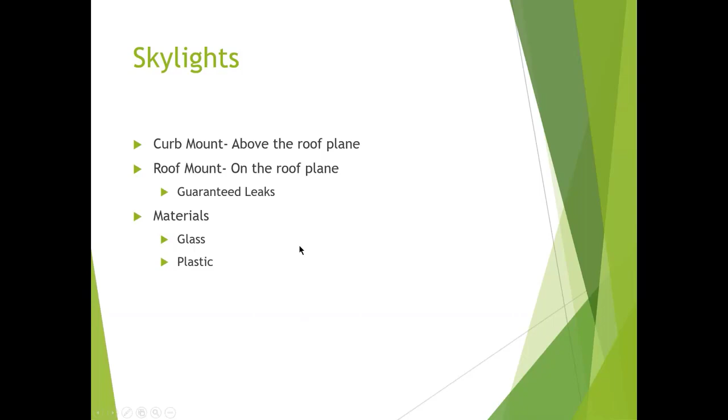Skylights. Curb mount above the roof plane, roof mount on the roof plane. They leak. They all leak. Glass and plastic. Glass might not leak. Plastic leaks. Velux is the only skylight that does not leak when it's properly installed, and it's difficult to install it wrong. There's Velux skylights, and there are every other type of skylight.

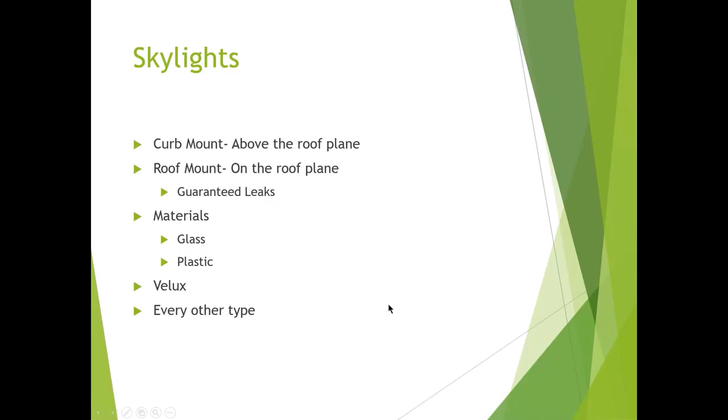Velux does not leak. You can identify Velux. They have a wooden frame inside. Even if it's painted, you can see like a 1-inch by 3-inch metal tag that if you could read it says Velux. That does not leak. Every other skylight, no matter who makes it, Pella, Andersen, cheap plastic knockoffs, they all leak under the right or the wrong situations.

Up on curbs where the skylight is off the roof, you have a much better chance. You're looking for step flashings on the side rather than pan flashings. Whenever you're seeing repairs on a skylight, that's a leak.

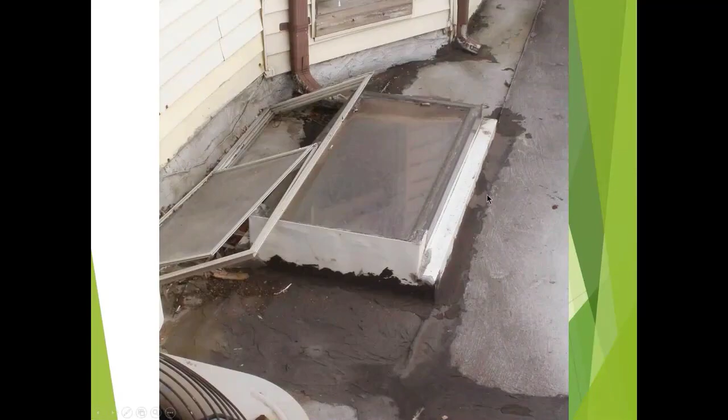Leaking under the right situations, the larger the skylight, the more prone to leaking. Nice flashing job, but again, you look at this under a worst case scenario. A best case scenario, it doesn't leak, but if you have these in bathrooms, these are really common in bathrooms in the 80s and 90s. You can get humidity and condensation, but most times the stains in these are leaks.

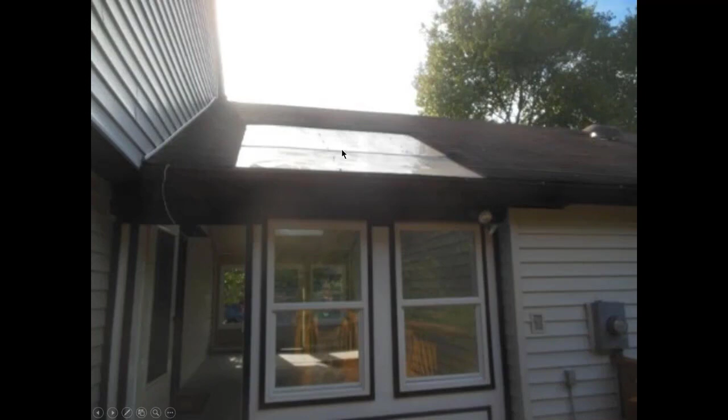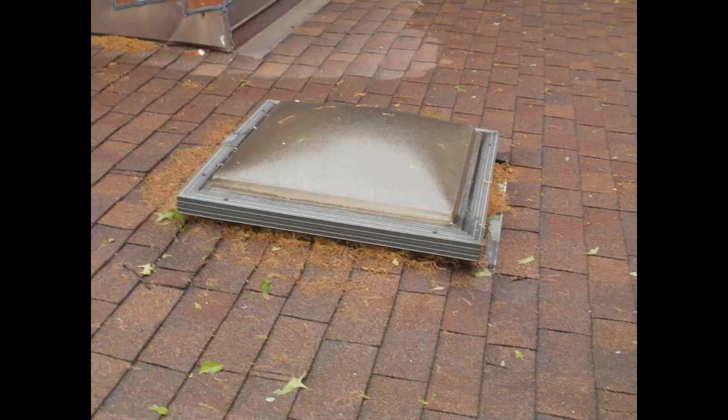This is just 2 pieces of sliding glass out of a slider. These are tempered insulated glass, they're intended to be installed vertically, 100% leak. Cheap plastic skylight, it's a pan flashing, not a step flashing. It's a Wasco, it leaks.